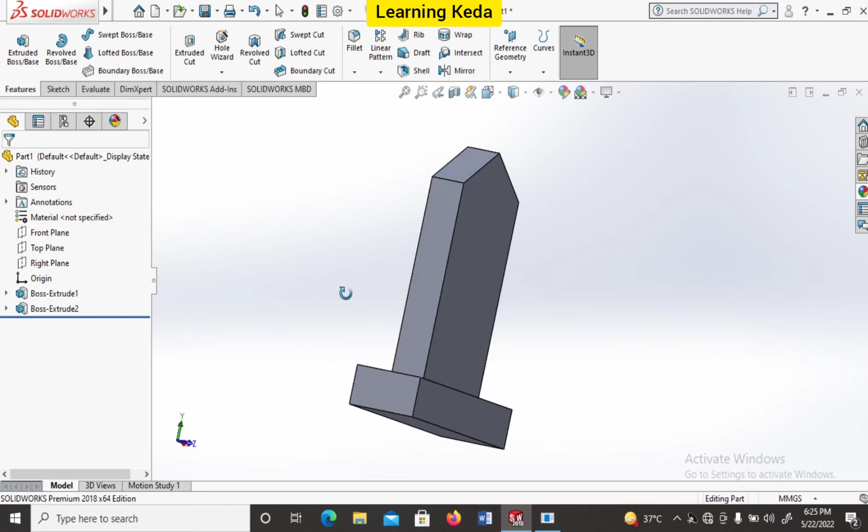Today we are going to prepare this shape in SOLIDWORKS. In this video we will learn how to prepare this shape in a very easy way. So let's start the video.

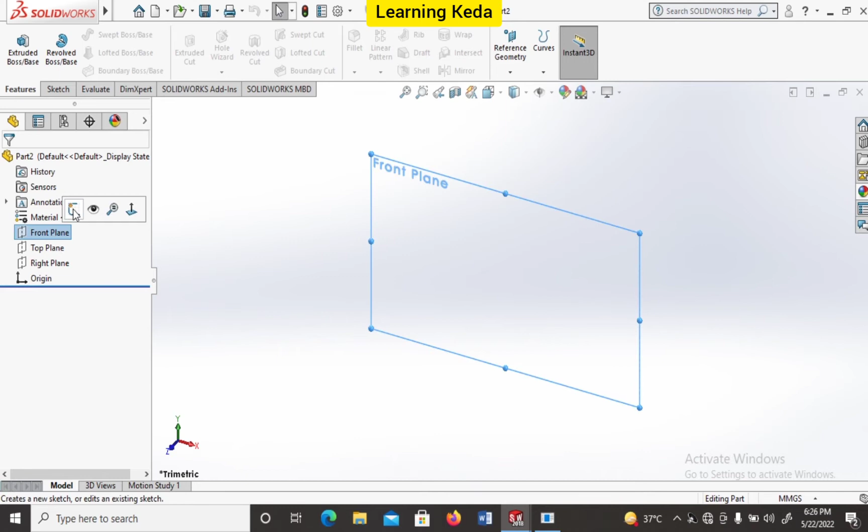Open a new file, click Part, OK. In the front plane, take a sketch, select line, and click on this point.

Now select these two lines by pressing Ctrl and add relation equal, so we see these two lines will be equal. By pressing Ctrl, select this point and the mid of this one, then select relation vertical, so this point and the mid of this point will be vertical.

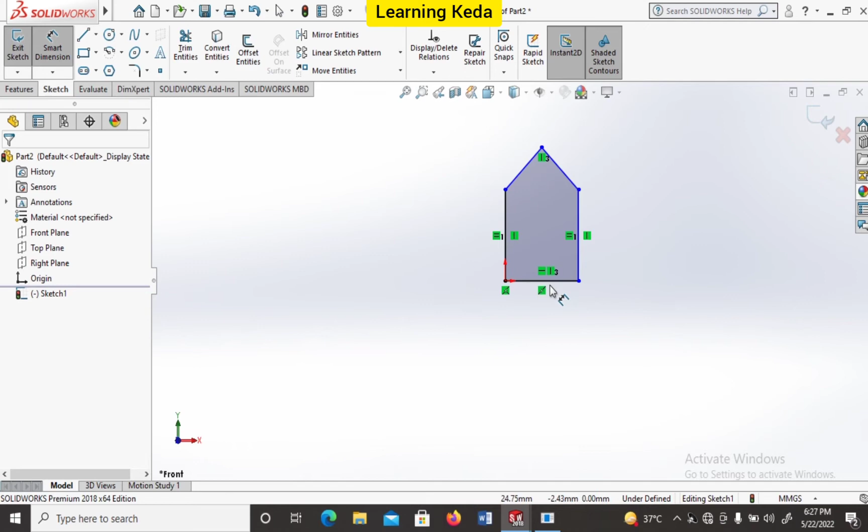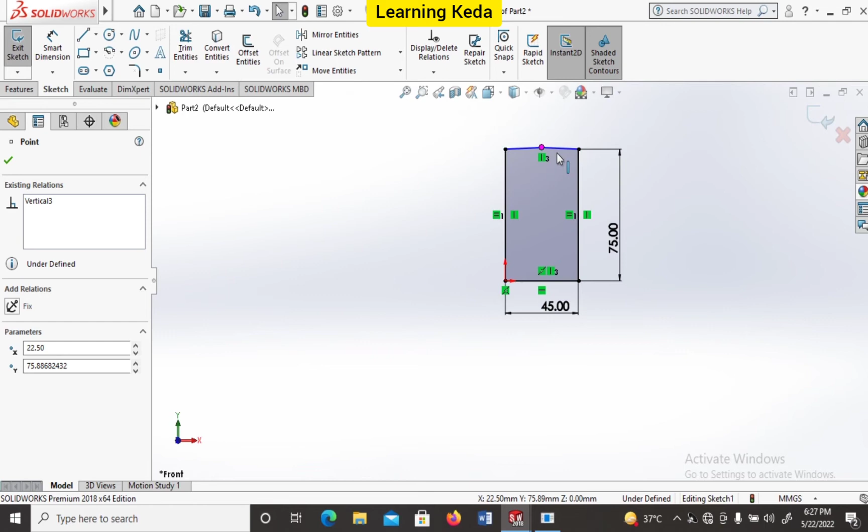Now go in smart dimension, click on this line and add dimension 45. This will be 75. This point and this will be 15.

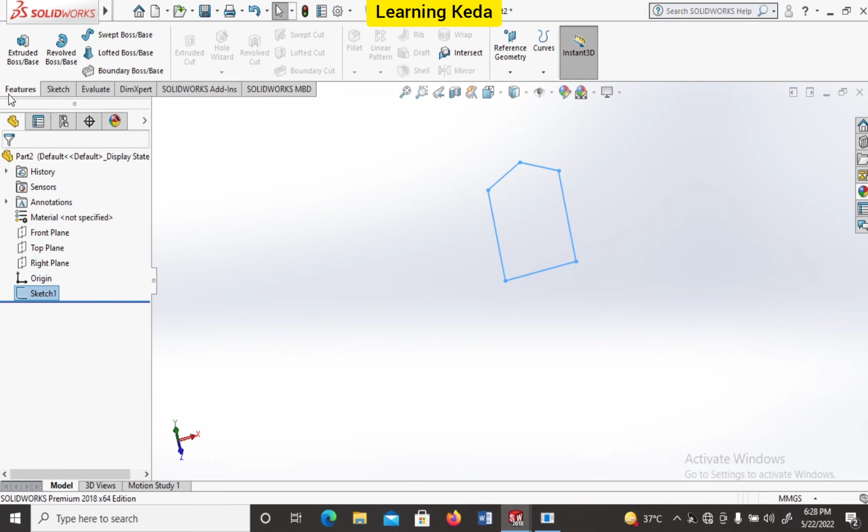Now our upper sketch will be prepared. Exit from smart dimension and exit from sketch, go in features, extrude boss base, and thickness will be 15 mm.

So our upper shape will be ready.

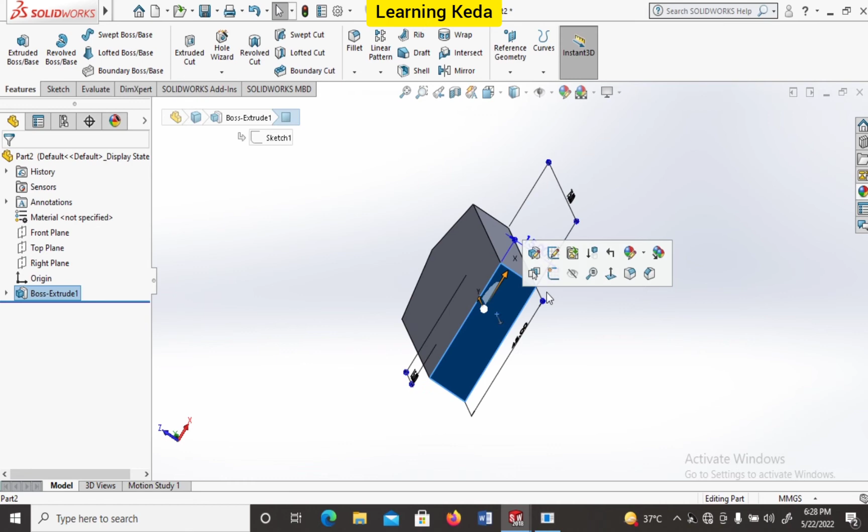Now select bottom part, sketch, Ctrl 8, take square and draw one square.

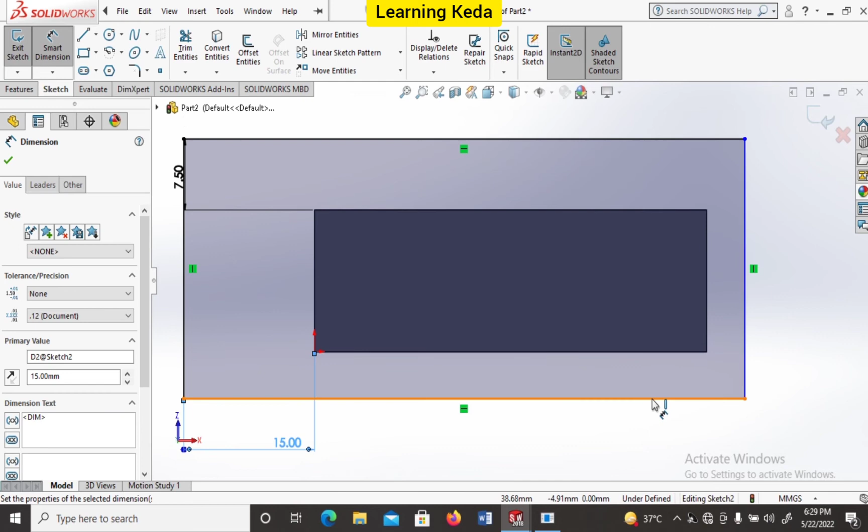Now go in smart dimension, select this line. This line will be 7.5. This line will be 15. Now select this, will be 75. This side will be 30.

Exit from smart dimension. Our lower base will be ready in form of sketch.

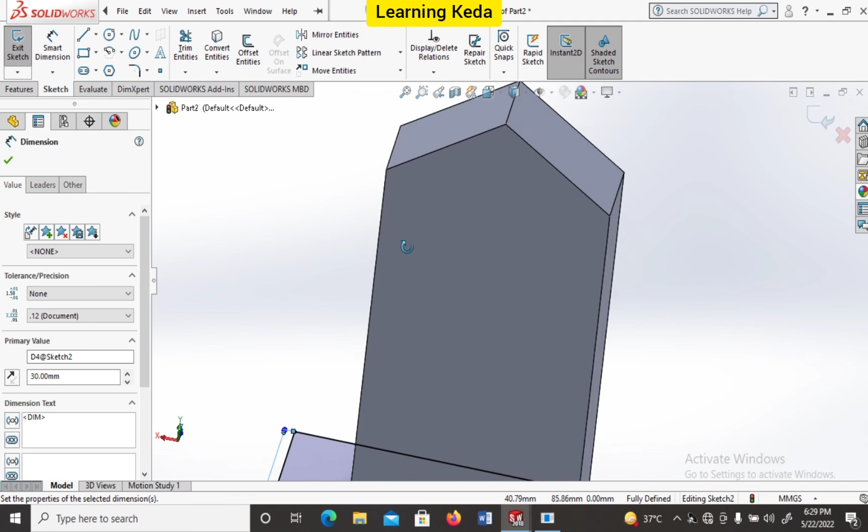Exit sketch, extrude boss base and add thickness 15 mm. Click OK. So our shape will be ready.